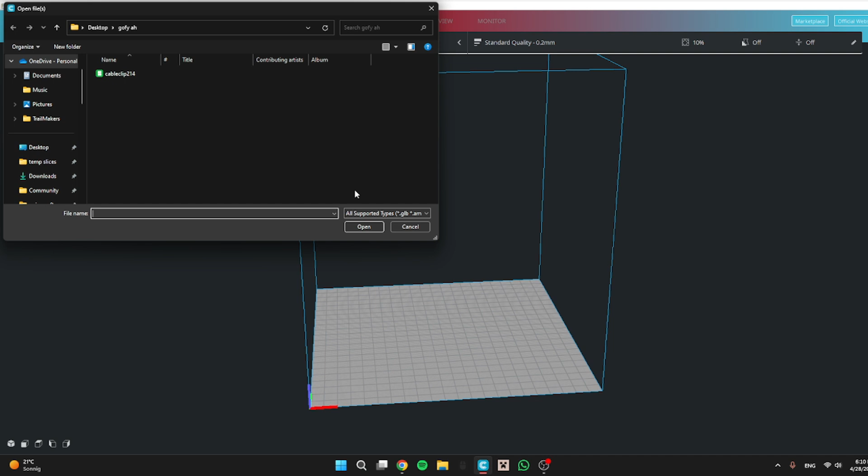So the first thing you want to do is import a file right here. So we've got the cable clip, and click on open. That's gonna import it. So now we've got a thing here.

That's something. And then you move around in every slicer differently, but for me it's right click to move the camera, and middle click to move it like that.

So you can click on it, reposition it anywhere you want. I always put it here because I've got the best adhesion here with a leveled bed and everything.

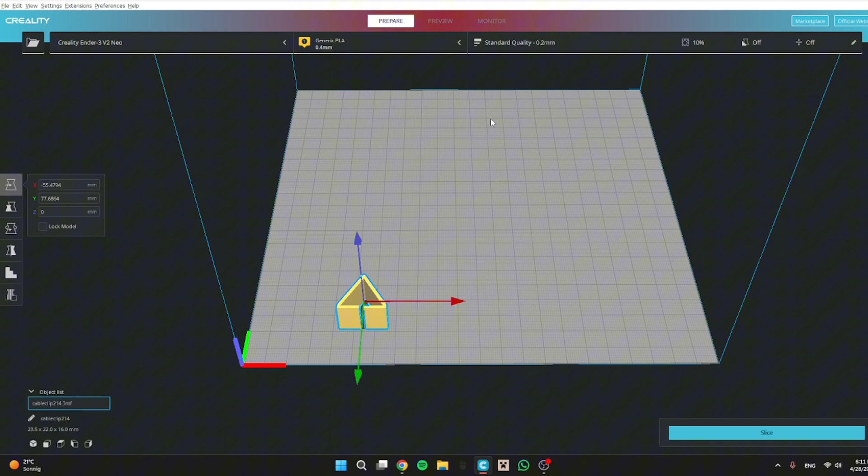And then if you select the object, you can see here - I think in other slicers it's on the top, I don't know - you can move it in the X axis. For example, let's do -60.

That moves it right here. We can put it on a clean number, just like that.

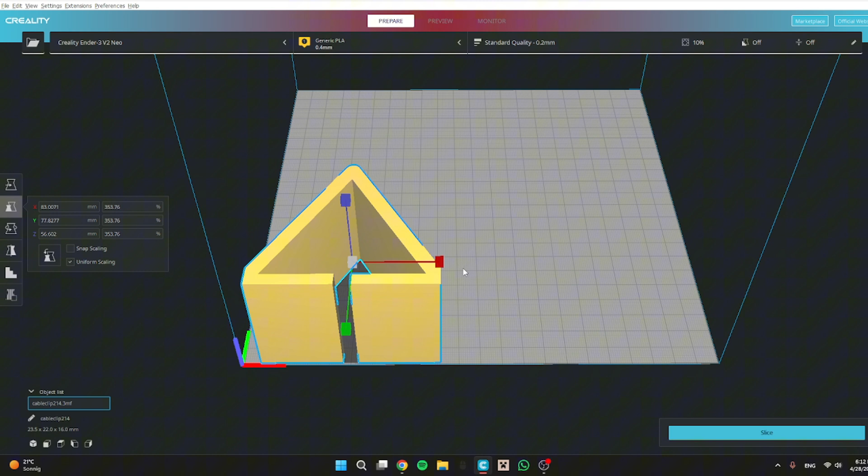And then we've got scaling, so you can scale the object up if you want to. And also you can do percentage here, so 90% of the original size, 150% of the original size.

But I always design my objects to just be print ready. And you can also do it with the millimeter size. So for example, we've got 22 millimeters from here to here.

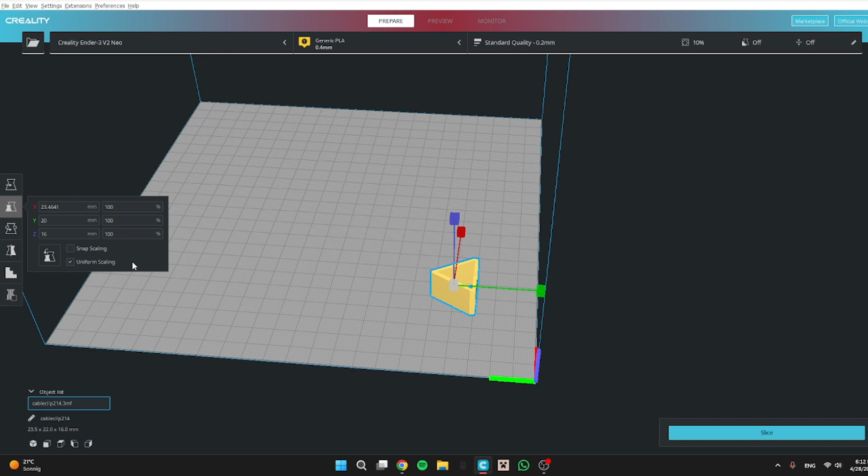And let's say you want it to be just 20. So you type in 20. It's not a good number on the percentage, but you've got 20 and then you're good.

And then you've got rotation, so you can rotate it however you want. For example, like that. You can also turn off snap rotation, but it's not recommended.

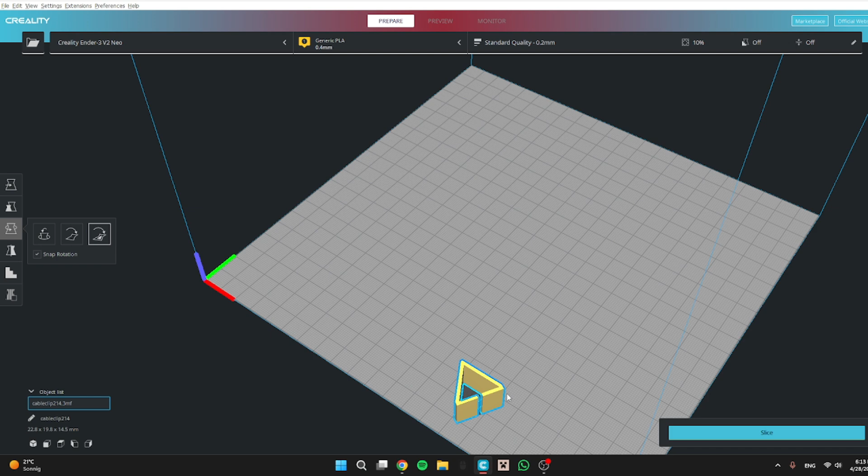And you can lay it flat. You can select a face to line up with the build plate, and you can reset it. Let's just move it over here again.

So that's your build plate right here. And then you can mirror it like that. Doesn't really do much. You can always hit Control Z if you messed up, just like that.

Then you can - what's this? I never use this, custom supports. Oh yeah, so you can do it custom, but it's not recommended.

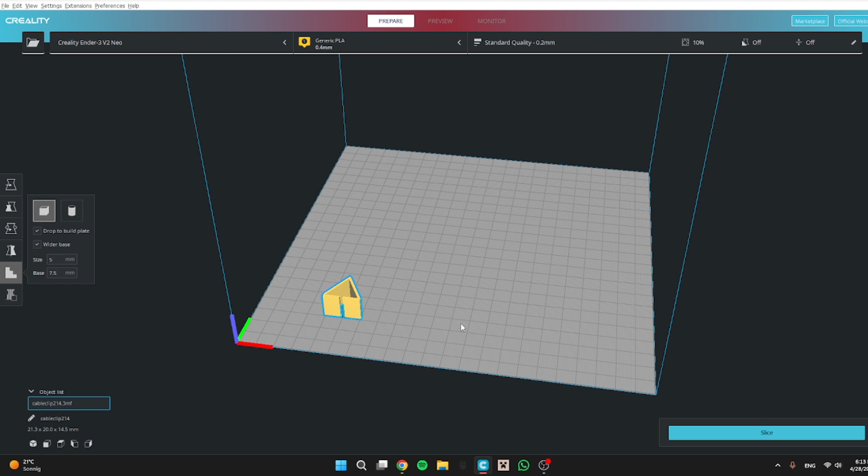You can also block supports right here, like if you don't want this area to be supported right here, you can do that. And then that's all of these functions.

Then this is the important part. Like you've got everything here. It's recommended, but it's not always the best, so I always use custom.

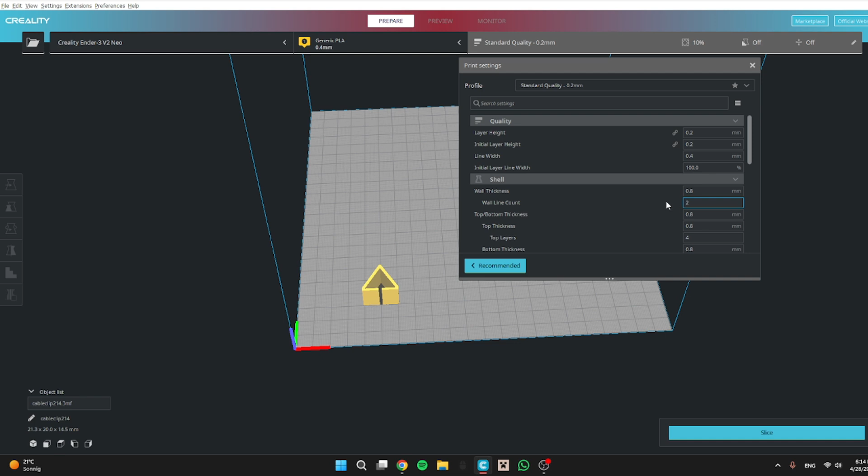You can do layer height here, initial layer height, so that's the layer height from the first layer. Bro, this part pissed me off so much - I had to take it like 25 times because I just couldn't get it right.

For example, if you want a layer height of 0.4, if you want to print high objects with low quality that don't really need to be high quality and you want to print them fast, then I always select 0.4. But the first layer is 0.2 because it's gonna adhere better to the build plate.

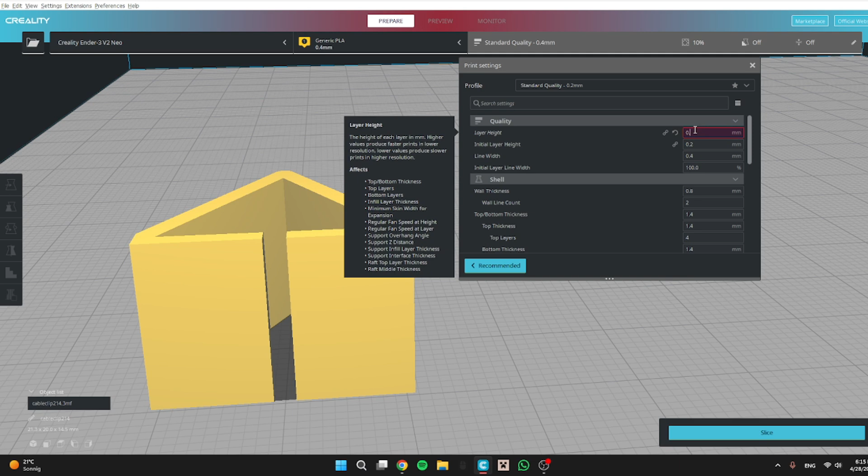Line width is pretty much the width of the line the nozzle draws. No shit. You always want to leave it just like the nozzle. Then initial line width, it's the first layer.

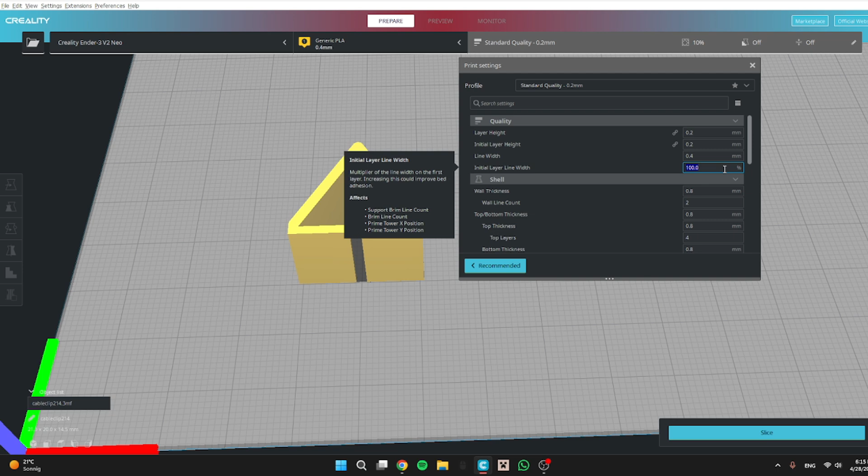So initial is the first layer, and that's a percentage of this line width. So if we want 0.3, I'm not good at maths, but I think it's gonna be 80%. Just leave it at 100.

And you can always, if you type something, do the normal thing again with the little arrow.

Now let's get to the shell. So the wall thickness - thickness of the wall - and wall line count, how many lines to draw for the walls, because a print is always built like wall, then support, and then wall again, and top layer, bottom layer.

So that's the walls, and that's the top and bottom. As I said, you always want to leave 4 top and 4 bottom layers, just because it's gonna be more stable and not break that easily. Horizontal expansion, I don't know what that is.

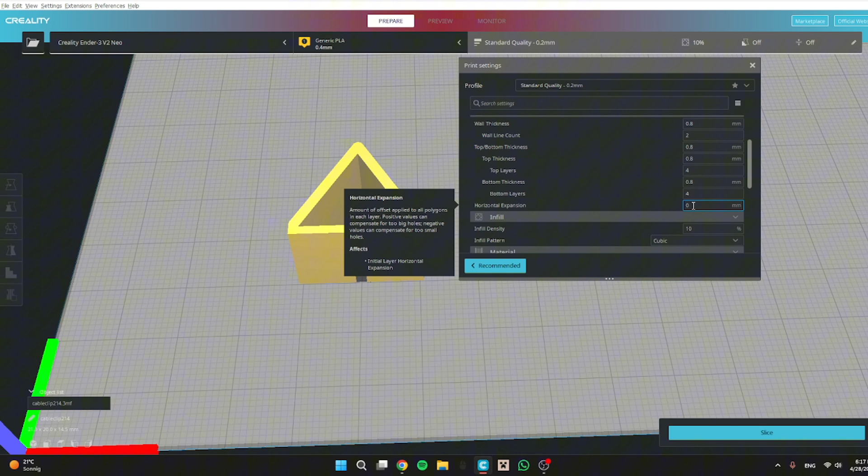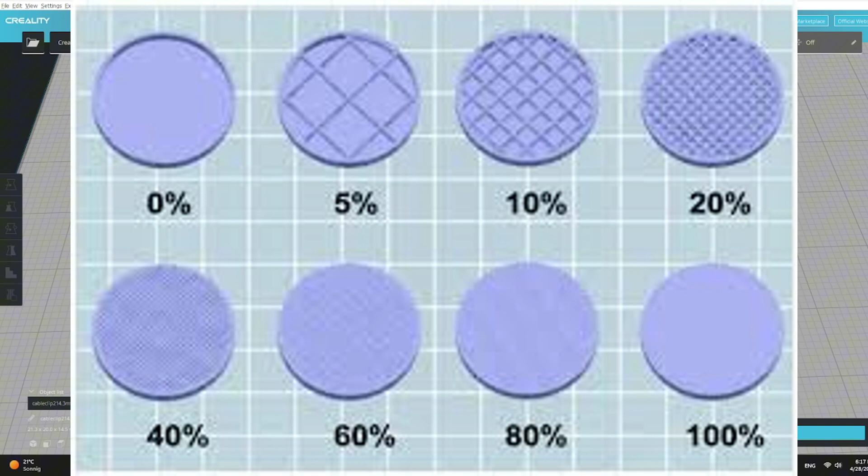Infill density is also a very important setting. It's pretty much the percentage, like 100% is completely filled in, so no gaps, no nothing, and 10% is essentially just 10% of it filled in with the infill. Then infill pattern, you can experiment a little with that, but I always leave it on cubic.

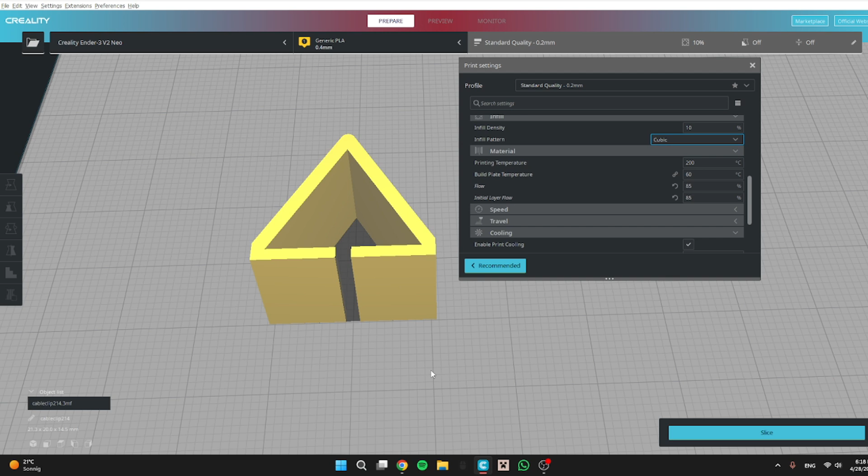Print temperature is also very important. If you print different materials, you print them differently, if they bridge or not, but I always set it on the printer, so that doesn't matter for me. Build plate temperature is just the temperature of the build plate, so if you put it higher, the plastic is gonna be a little softened at the bottom, so it adheres better to the build plate.

Flow is very important, so if you customize your printer like I do, you have to do several flow tests to get the right amount of material flowing out, because if it's too much, it's just gonna be a huge mess. If it's not enough, it's not gonna adhere to the layers and won't be stable.

Print speed is just the speed of how the nozzle travels. So you've got infill speed, wall speed, top bottom speed. Travel speed is if the nozzle goes from here to here to here, then it's gonna go from here without printing anything to here, or for bigger parts, from here to here. This is the travel speed, how fast the printer head travels without printing.

Initial layer speed is the speed of the first layer. It's gotta be a little lower than the normal print speed, because the first layer is the most important.

Retraction happens after every finished layer or before any travel. It retracts the filament from the nozzle so it's not gonna be messy or have anything come out that doesn't need to come out. The distance is how much filament it pulls and at what speed. Z-hop is just when it retracts, it goes a little up so it doesn't make a mess, but that works for my printer too even if it's turned off.

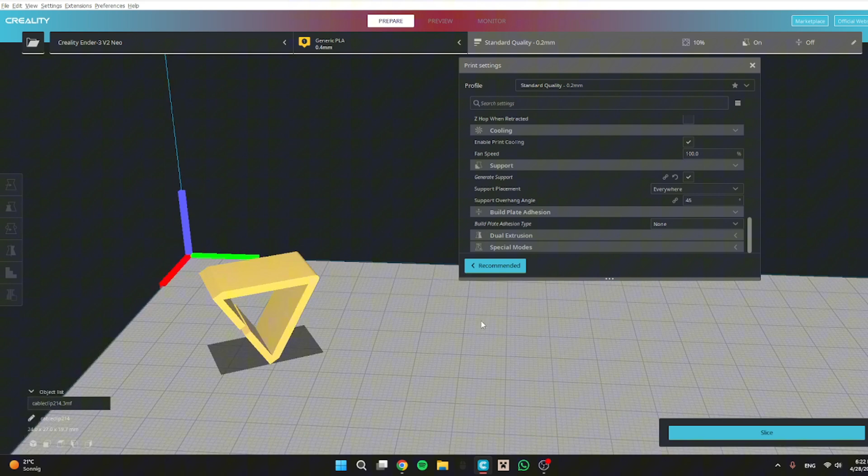Cooling, pretty self-explanatory. Support is essentially for floating things, like for example if I were to do this, which is not recommended, that would need support. That's where support comes in. At 0 degrees everything is supported, even these little things, and at 90 degrees nothing is supported. It's like reverse, I don't know why that is.

Build plate adhesion just makes a little thing on the build plate for the print object to stick better to the build plate. So if we do brim - I think dual extrusion is not supported on most printers - and spiralized outer contour, it just does one wall and it just doesn't stop, it goes up and up and up and up.

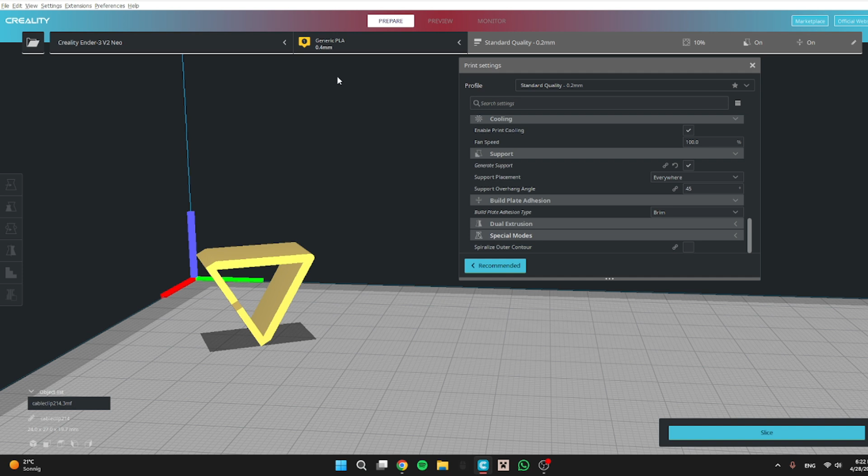So here you've got the slice button. Let's just slice it. It says 29 minutes, how much filament, how many meters, and how much it costs if you set it right here.

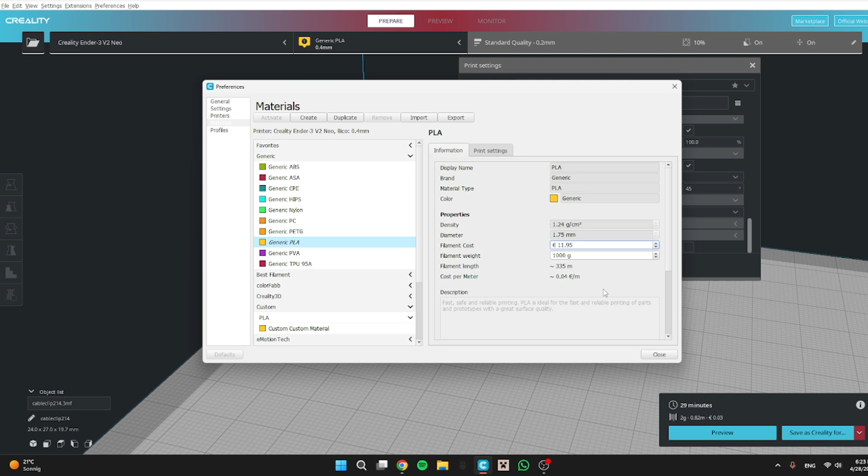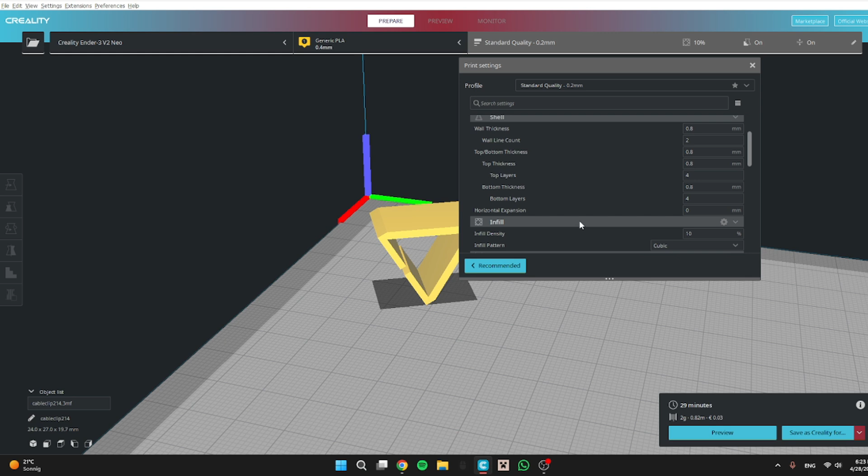Materials - I've got generic PLA set to 11.95 because that's how much it costs, and it estimates everything here, and you can do it for every filament type. You've got profiles here, I don't really mess with that. Printers, I've got mine. Settings, if you select everything it's gonna be a huge mess, and it's gonna show every little setting that's automatically set on most things, and general stuff like language, currency, everything. Then you've got the preview, so it's up here too.

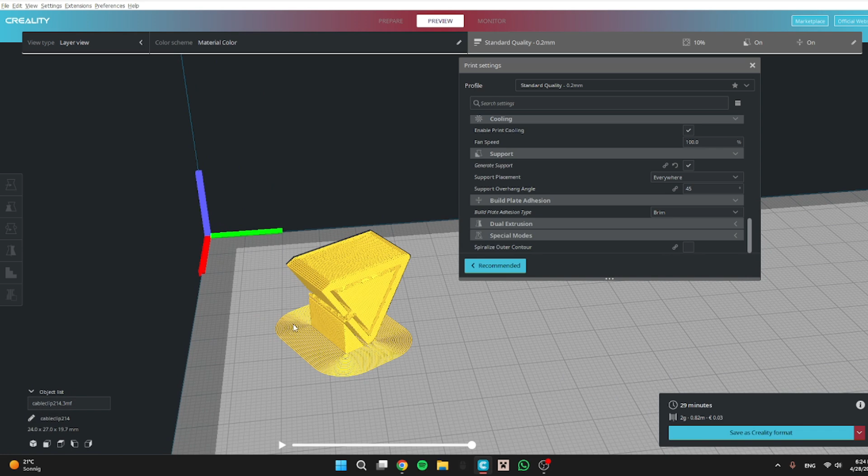So as we can see, we selected the build plate adhesion as a brim, so it does that little thing, and then it supports all of this. That's support essentially, and you can then save it, or if you've got a better printer than mine, you can just directly send it to the printer and it would just print it out.